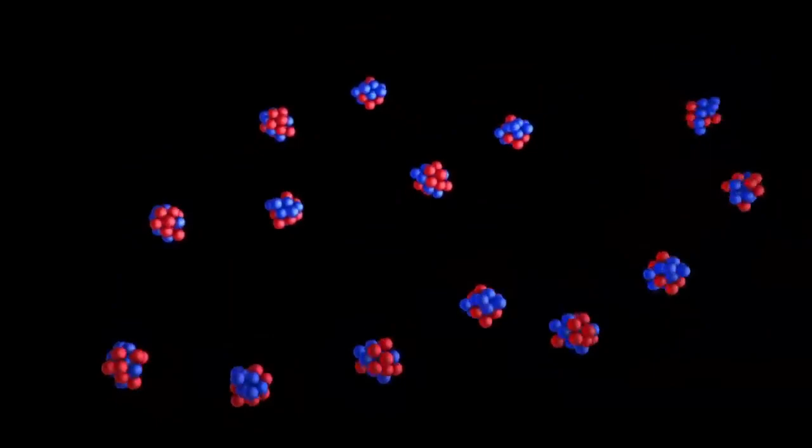Space travel has been one of man's greatest dreams, having the ability to go beyond the comfort of Earth and travel to various galaxies and the great unknown for exploration in search of answers, or just to have a nice time in the stars. But this dream has been hampered because we do not have the jet propulsion technology to properly escape our homeworld.

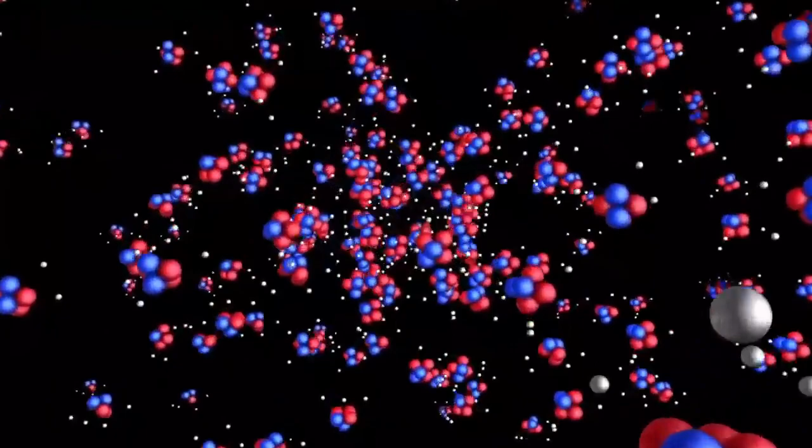But all this will soon be a thing of the past, as nuclear thermal propulsion, which uses heat energy from the nuclear reaction at its core for fuel, could be used one day in human spaceflight, possibly in the not-too-distant future for our colonization of Mars. Its development is the one true challenge, as the materials used must be able to withstand high heat and bombardment of highly charged particles regularly.

There is a new space race developing, with higher stakes and more ambitious goals than just going back to Earth orbit or the Moon. The United States, which has developed a sizable lead on technologies in rocket and satellite technology, has in turn grown its national and global space ambitions. Now that it is practicable to get to low Earth orbit affordably and reliably, astronauts and private companies are now looking to take it further, including establishing permanent colonies on the Moon and Mars, mining asteroids for their immense natural deposits, and sending astronauts to search for life on the moons of the outer planets.

And America is not the only one in this race. China and Russia are working together on a lunar base, and China claims it will be the first to colonize Mars and even mine asteroids.

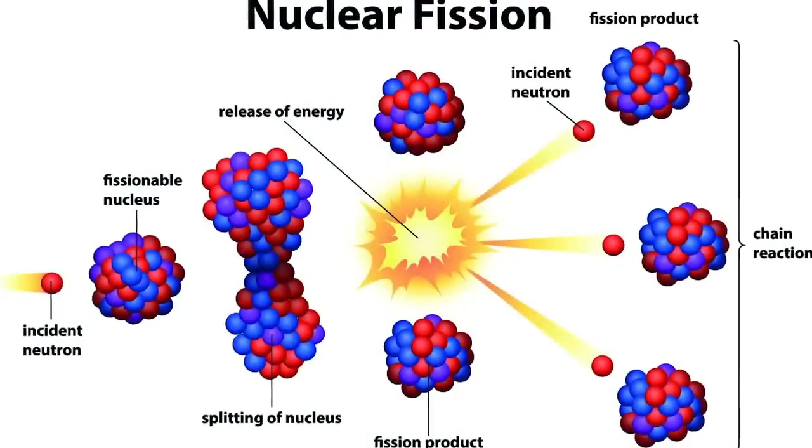Nuclear fission and fusion power will be essential to accomplishing these and other ambitions. These technologies can deliver the performance, including immense power levels, longevity, and reliability, required to take large people and cargo astronomically long distances, and support the power requirements for long-term colonies far removed from the safety net of Earth.

To this end, China is reportedly making investments in the advanced propulsion sector, including in fission and fusion contracts that dwarf U.S. effort. For the United States to remain competitive on the world scale and win what some are calling the new deep space race, they must double down on investment in nuclear fission and fusion technologies.

Will Searight, a nuclear engineering doctoral student at Penn State, is contributing to research that could make these advancements more feasible. He published findings from a preliminary design simulation in Fusion Science and Technology, a publication of the American Nuclear Society. To better investigate nuclear thermal propulsion, Searight simulated a small-scale laboratory experiment known as a hydrogen test loop.

The setup mimics a reactor's operation in space, where hydrogen travels through the core and propels the rocket at temperatures up to nearly 2,200 degrees Fahrenheit.

Searight developed the simulation using dimensions from detailed drawings of tie tubes, the components that make up much of the test loop through which hydrogen flows. Industry partner Ultra-Safe Nuclear Corporation, USNC, provided the drawings.

Understanding how USNC's components behave in a hot hydrogen environment is crucial to bringing our rockets to space, Searight reasoned. We are thrilled to be working with one of the main reactor contractors for NASA's Space Nuclear Propulsion Project, which is seeking to produce a demonstration nuclear thermal propulsion engine within a decade.

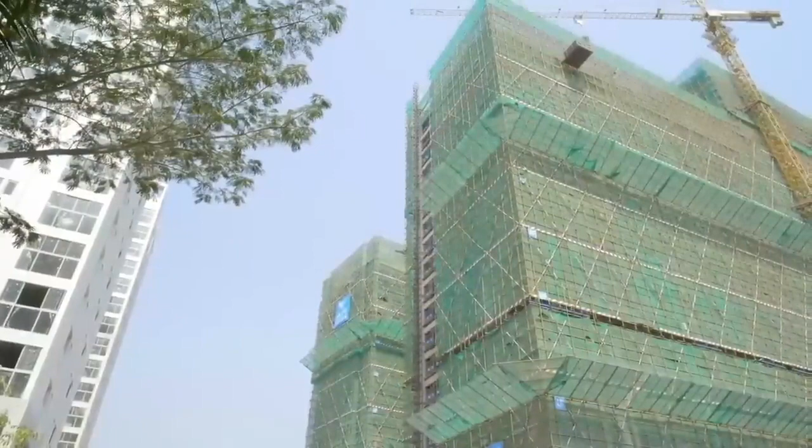Data collected from the modeling software showed that the flow of hydrogen through the test section was smooth and uniform, reducing the uneven distribution of heat through the loop that could jeopardize the setup's safety and lifespan. Analysis of the results also verified that stainless steel would allow for more convenient and cost-effective construction of the loop.

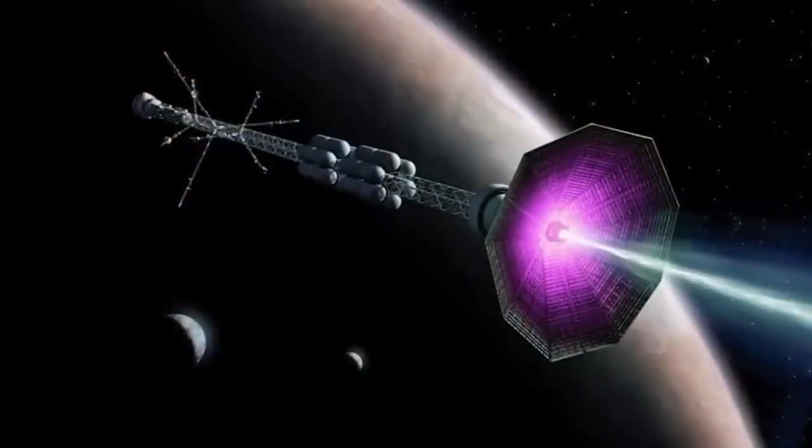The fusion rocket. So one might wonder, a fusion rocket? How's that possible? Are we onto some Star Trek imaginations right now?

A fusion rocket is a theoretical design for a rocket driven by fusion propulsion that could provide efficient and sustained acceleration in space without the need to carry a large fuel supply. The design requires fusion power technology beyond current capabilities and much larger and more complex rockets.

Fusion nuclear pulse propulsion is one approach to using nuclear fusion energy to provide propulsion. Fusion's main advantage is its very high specific impulse, while its main disadvantage is the likely large mass of the reactor. A fusion rocket may produce less radiation than a fission rocket, reducing the shielding mass needed.

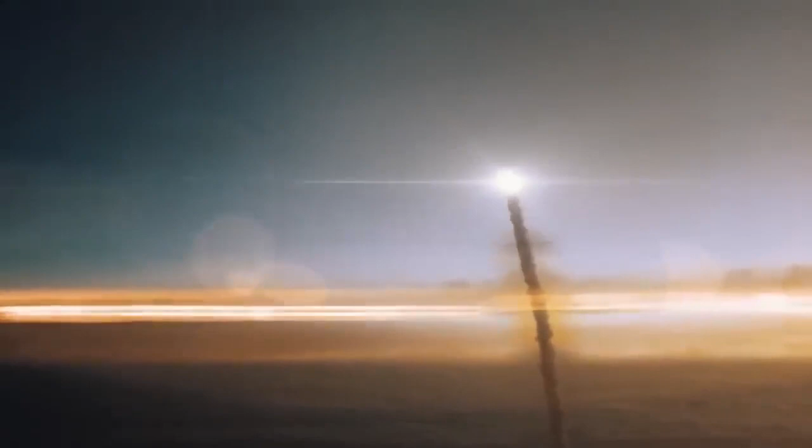The surest way of building a fusion rocket is to use hydrogen bombs as proposed in Project Orion, but such a spacecraft would be massive, and the Partial Nuclear Test Ban Treaty prohibits the use of such bombs. For that reason, bomb-based rockets would likely be limited to operating only in space.

An alternative approach uses electrical, e.g. ion propulsion, with electric power generated by fusion instead of direct thrust. Spacecraft propulsion methods such as ion thrusters require electric power to run, but are highly efficient. In some cases, their thrust is limited by the amount of power that can be generated running on fusion power that could drive such a ship.

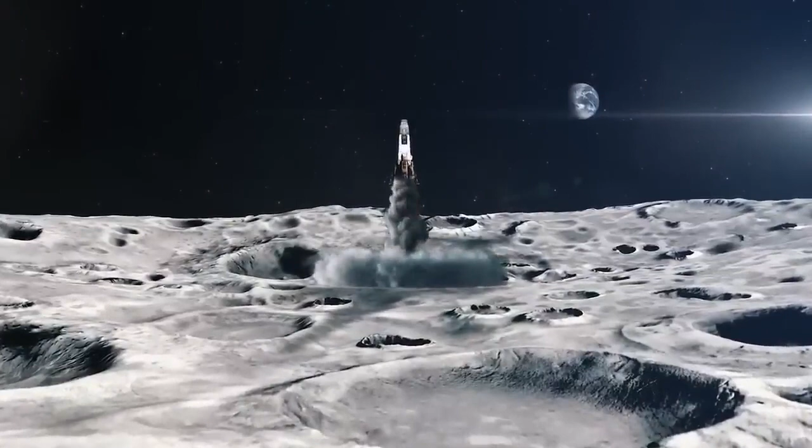One disadvantage is that conventional electricity production requires a low-temperature energy sink, which is difficult, i.e. heavy, in a spacecraft. Direct conversion of the kinetic energy of fusion products into electricity mitigates this problem.

One attractive possibility is to direct the fusion exhaust out the back of the rocket to provide thrust without the intermediate production of electricity. This would be easier with some confinement schemes, example magnetic mirrors, than with others, example tokamaks. It is also more attractive for advanced fuels.

Helium-3 propulsion would use the fusion of helium-3 atoms as a power source. Helium-3, an isotope of helium with 2 protons and 1 neutron, could be fused with deuterium in a reactor. The resulting energy release could expel propellant out the back of the spacecraft.

Helium-3 is proposed as a power source for spacecraft mainly because of its lunar abundance. Scientists estimate that 1 million tons of accessible helium-3 are present on the Moon.

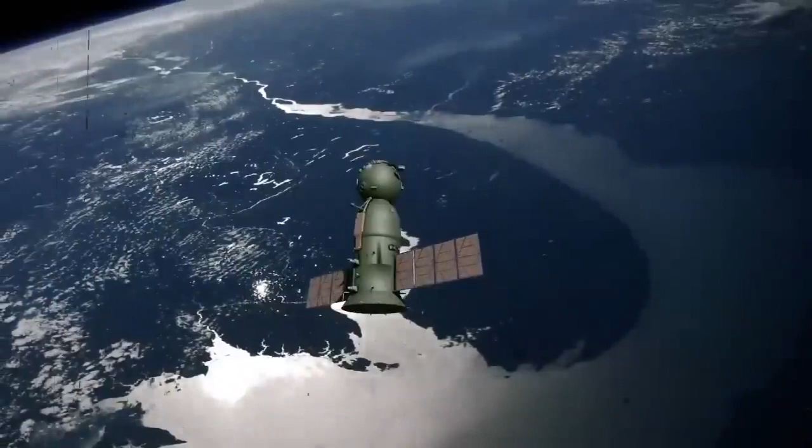Only 20% of the power produced by the DT reaction could be used this way, while the other 80% is released as neutrons, which, because they cannot be directed by magnetic fields or solid walls, would be difficult to direct towards thrust. Helium-3 is produced through the beta decay of tritium, which can be produced from deuterium, lithium, or boron.

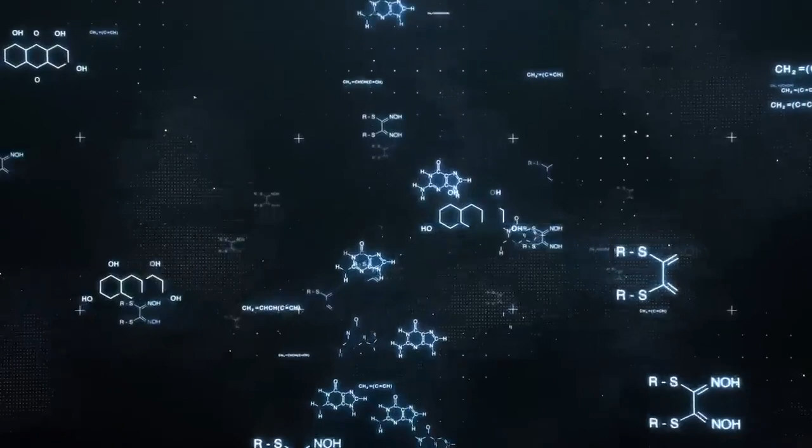Even if a self-sustaining fusion reaction cannot be produced, it might be possible to use fusion to boost the efficiency of another propulsion system, such as a VASIMR engine.

So this poses the question, what are the confinement alternatives? Magnetic: to sustain a fusion reaction, the plasma must be confined. The most widely studied configuration for terrestrial fusion is the tokamak, a form of magnetic confinement fusion. Currently, tokamaks weigh a great deal, so the thrust-to-weight ratio would seem unacceptable.

NASA's Glenn Research Center proposed a small aspect ratio spherical torus reactor for its Discovery 2 that could deliver a crewed 172,000 kilogram payload to Jupiter in 118 days, or 212 days to Saturn, using 861 metric tons of hydrogen propellant plus 11 metric tons of helium-3 deuterium, DHE3, fusion fuel.

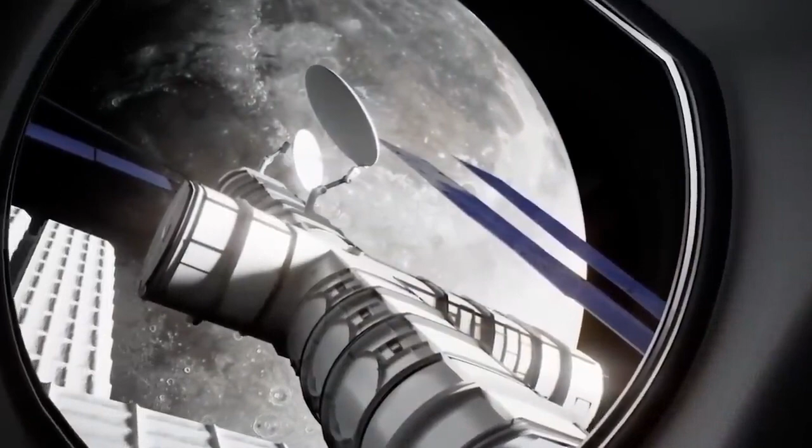The hydrogen is heated by the fusion plasma debris to increase thrust at a cost of reduced exhaust velocity, 348 to 463 kilometers per second, and hence increased propellant mass.

Inertial: the main alternative to magnetic confinement is inertial confinement fusion, ICF, such as that proposed by Project Daedalus. A small pellet of fusion fuel with a diameter of a couple of millimeters would be ignited by an electron beam or a laser. To produce direct thrust, a magnetic field forms the pusher plate.

In principle, the helium-3 deuterium reaction or an aneutronic fusion reaction could be used to maximize the energy in charged particles and to minimize radiation, but it is highly questionable whether using these reactions is technically feasible. Both of the detailed design studies in the 1970s, the Orion Drive and Project Daedalus, used inertial confinement.

In the 1980s, Lawrence Livermore National Laboratory and NASA studied an ICF-powered Vehicle for Interplanetary Transport Applications, or VISTA. The conical VISTA spacecraft could deliver a 100-ton payload to Mars orbit and return to Earth in 130 days, or to Jupiter orbit and back in 403 days.

41 tons of deuterium-tritium (DT) fusion fuel would be required, plus 4,124 tons of hydrogen expellant. The exhaust velocity would be 157 kilometers per second.

Magnetized target fusion, or MTF, is a relatively new approach that combines the best features of the more widely studied magnetic confinement fusion—good energy confinement—and inertial confinement fusion—efficient compression heating and wall-free containment of the fusing plasma.

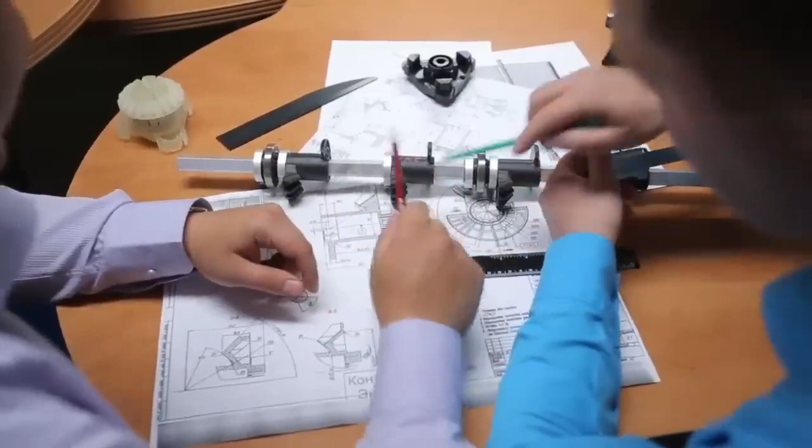Thanks! World's tallest buildings—skyscrapers, part of the increasingly impressive modern marvels which can be counted as insane, taking into account how high they rise above the clouds, seeming to rise endlessly into the sky. Some of them are residential buildings, some others are offices, and a very few select are a hybrid mix of offices, apartments, and even hotel rooms.

The views are breathtaking, but they come down to cost. Take the Burj Khalifa in downtown Dubai, for instance, which features residential units varying from studios to an opulent 5-bedroom penthouse that was going for $27,770,000 in 2017.

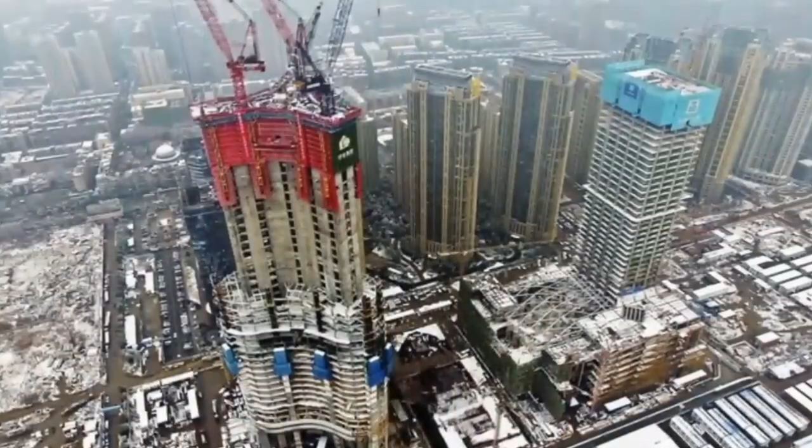Wuhan Greenland Center. Location, Wuhan, China. Height, 1,562 feet. Completion, 2022, estimated. Work done on this skyscraper, which is ongoing by the way, began in June 2012 and will feature hotel rooms and office space in addition to parking space, banquet halls, and even bike storage space. Originally, the Wuhan Greenland building was going to be 2,087 feet, but that was abandoned because of airspace restrictions.

Central Park Tower. Location, New York, USA. Height, 1,550 feet. Completion, 2020. Located at 217 West 57th Street, Central Park Tower is located along Billionaires Row in Midtown and is also known as Nordstrom Tower because of the Nordstrom store on the lower floors. This structure is the tallest residential building in the world, housing 179 condo units that start at a cool $7 million. The $3 billion project is also the second tallest building in the United States and features an incredible view of its namesake park.

Lakhta Center. Location, St. Petersburg, Russia. Height, 1,516 feet. Completion date, 2019. Striking straight into the sky, the distinct design of the Lakhta Center on the outskirts of St. Petersburg offers a lonely spire in a horizontal landscape that will serve as the centerpiece to a growing neighborhood around it that includes plenty of open space for pedestrians. The building includes thermal insulation through a double-glazed facade to combat the summertime heat and an ice formation control system for winter weather.

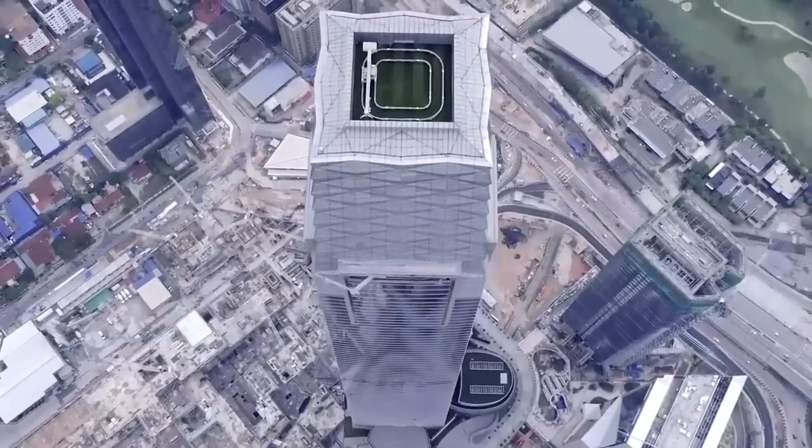The Exchange 106. Location, Kuala Lumpur, Malaysia. Height, 1,462 feet. Completion date 2019. Using a 12-story illuminated crown to accentuate the height of the exchange development in the Tun Razak Exchange Financial District development in Kuala Lumpur, the new skyscraper gives visitors a shiny new example of height in Malaysia. The Peter Chan architect design is structurally completed with the opening, including a mix of uses of the 106-floor building planned then for 2019.

With that, we have come to the end of the video.

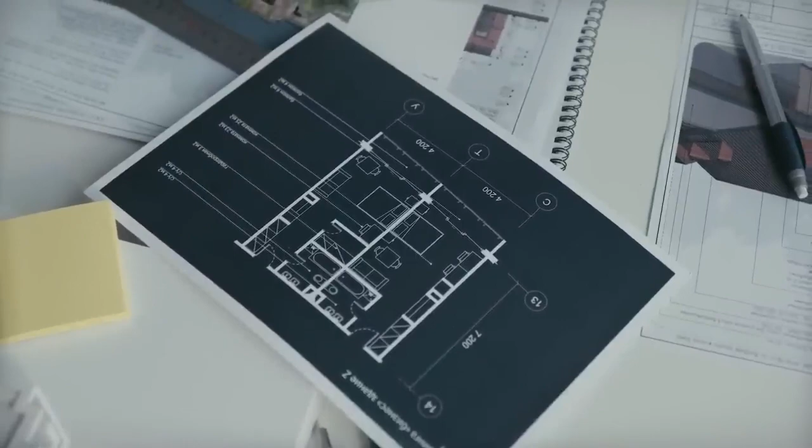Channel Engineering Progress, where we bring, dissect, and explain in easy-to-digest bits some of the most complex engineering feats and happenings. Today on this stream, we're discussing the world's deepest swimming pool.

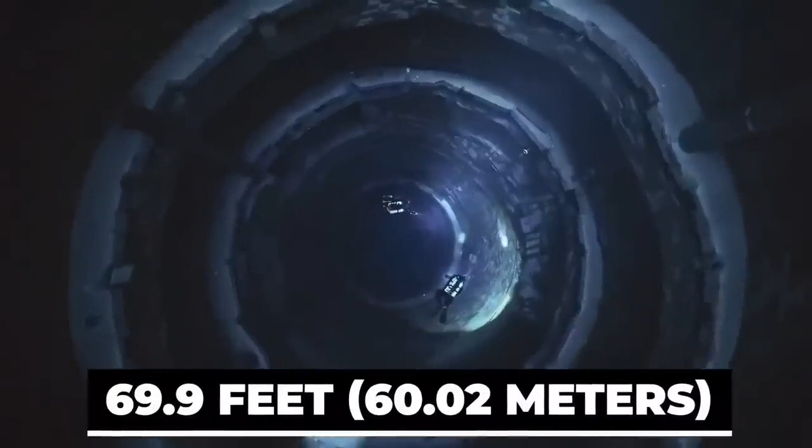There's also a record that went under the radar till an Instagram video from Will Smith brought it to the world's attention: the deepest swimming pool ever created. Deep Dive Dubai, located in Dubai's Nad Al Sheba neighborhood, is now verified by the Guinness World Record as the world's deepest swimming pool, at a depth of 69.9 feet or 60.02 meters, and holds 14 million liters of water, that the owners say is equivalent to 6 Olympic-sized swimming pools.

Deep Dive Dubai allows thrill seekers to dive inwards and discover a new underwater dimension filled with adventure and wonder. We offer an unparalleled experience with year-round diving in a safe environment with outstanding instructors and services. Abdullah bin Habtour, spokesperson for Deep Dive Dubai, said in a statement, 'This facility is an investment in Dubai's growing sports culture and will add another world-class destination to Dubai's thriving tourist attraction and adventure tourism sector.'

The pool, which is shaped like a giant oyster, is a nod to the region's pearl diving heritage. It features the latest technology for divers, including a hyperbaric chamber along with an entire sunken city for the divers to explore. The pool also comes with state-of-the-art lighting, sound, and a mood system.

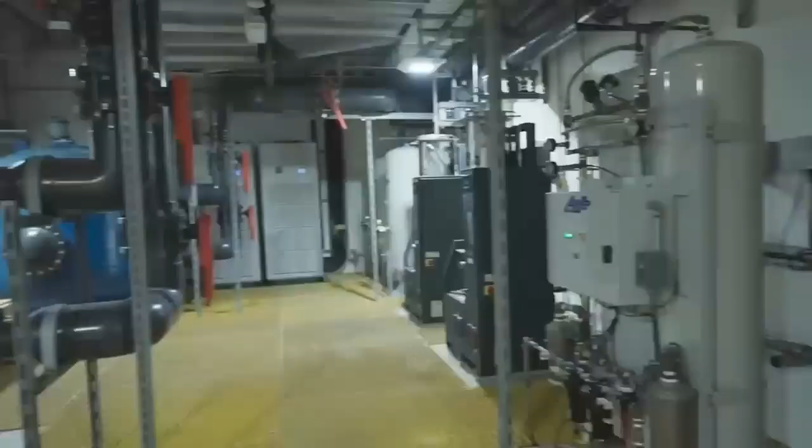The pool's water is also ultra clean, thanks to its filtration system that circulates water every 6 hours through siliceous volcanic rock, NASA-developed filter technology, and UV radiation. Water temperature is maintained at 30 degrees Celsius, 86 degrees Fahrenheit, a comfortable temperature for wearing a thin wetsuit or a swimsuit. Bin Habtour also added, 'We hope to embody the determination of Emirati explorers and innovators, both past and present, as well as provide a platform for future achievements and discoveries.'

Beyond the pool itself, the facility is also home to a dive shop, gift shop, and 80-seat restaurant which is open to the public, as well as a variety of meeting, event, and conference spaces, a sunken city, and underwater film studio.

Ever had the childhood dream of having a pool so big you can put some of your life-size toys in it, with various channels and tunnel access leading to various chambers housing them? Well, you can, kinda. You can go play with all the ones owned by Deep Dive Dubai.

The biggest star of Deep Dive Dubai is arguably the pool's underwater city. Divers can explore abandoned sunken city apartments and play underwater pool in the arcade. State-of-the-art lighting and sound systems have been fitted inside the pool to create different atmospheres, reaching depths of 60.02 meters, and that is barely scraping the surface of the astonishing features the facility contains.

Within the pool's abyssal depths is a lost city, complete with derelict streetscapes, apartments, and many more surprises. It's safe to say that the project takes pool design to a whole new level, in an embodiment of Dubai's endless quest for ostentation.

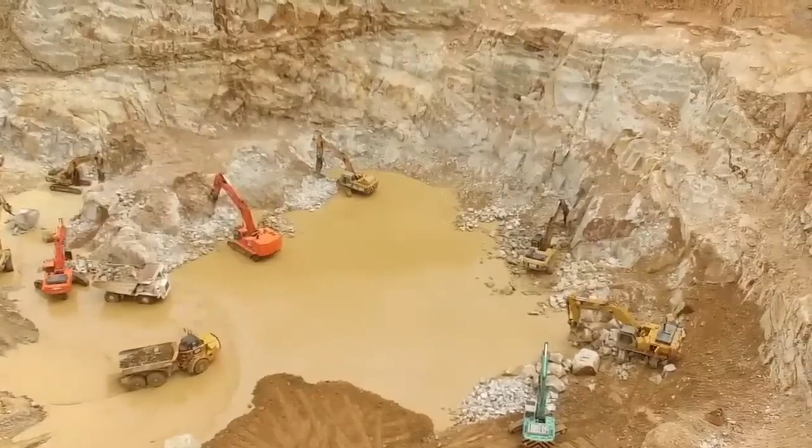Regarding obstacles encountered in realizing such an ambitious project, Kjoller shares that digging a 60-meter shaft in the sand was a challenge, as was managing galvanic corrosion in an environment with so many different metals and materials.

The pool also acts as an underwater film studio, the largest of its kind in the region. A media editing room is available nearby the facility.

Deep Dive Dubai also offers courses for both diving beginners and certified divers. Divers can also explore the pool and underwater city by themselves after a tour with one of the dive guides at the site. Some 56 cameras have been installed around the pool to ensure the safety of divers at every corner.

It also has the region's most advanced hyperbaric chamber, with a capacity of 12 people in case of an emergency. There are quite a few dive pools in the world that are deep, but this one is so much more interesting, the Deep Dive director stated.

It's not only deepest and largest, but the sunken city effect makes it next world order. There are so many things, it's not fair to call it a pool. In a city like Dubai, where it's difficult for architects to hide their projects from each other to prevent competition until a few weeks before launch, Deep Dive Dubai was properly kept under wraps, and that's a testament in itself.

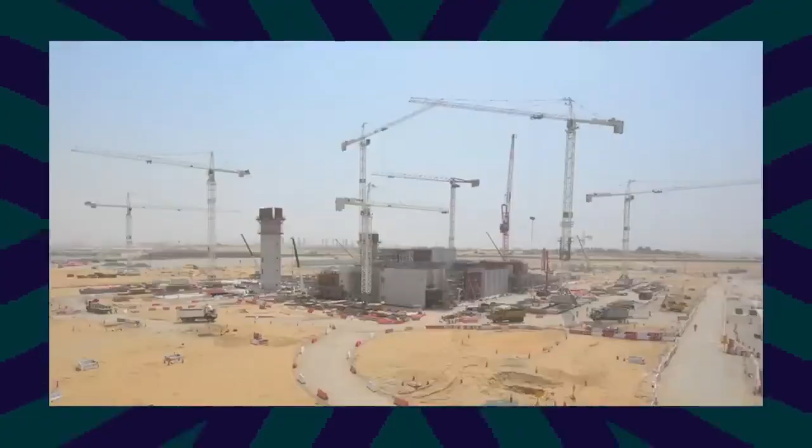Therefore, there's not much information around how it was constructed and the science behind its construction. But one certain thing: in building a record-breaking pool, there are some unusual traits they have in common.

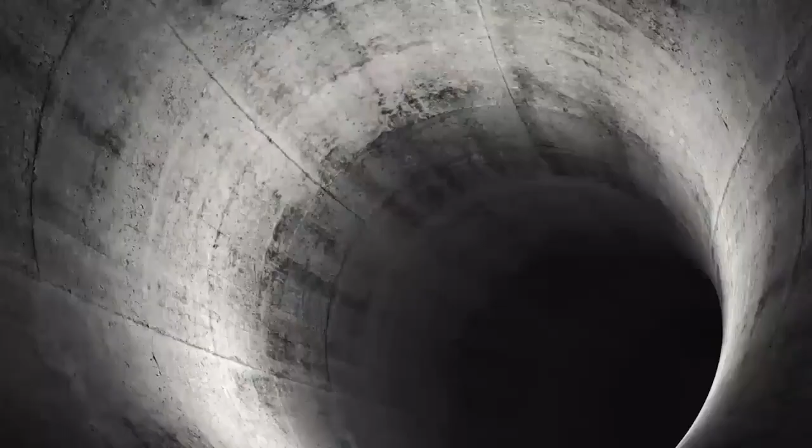Working from the top down, the process is basically like constructing pools within pools. As the first chamber is excavated and lined with concrete, it becomes the launch point for the next chamber, and those chambers become progressively smaller the deeper the pool goes, all culminating in a narrow dive shaft.

Due to the amount of pressure the shaft will be under when the pool is filled, it is formed from a precast concrete tube that is reinforced with a further 1.5 meters of concrete around it. The whole thing is designed to move and settle in the ground once the weight of the water is added, and divers are advised not to travel more than 300 meters above sea level within 24 hours of visiting.

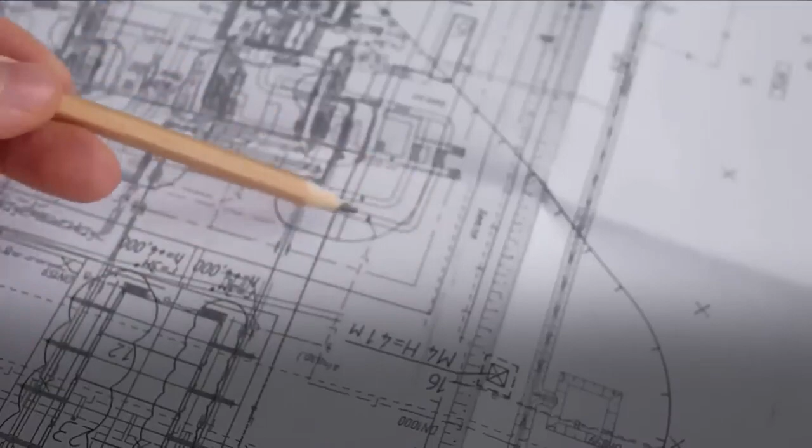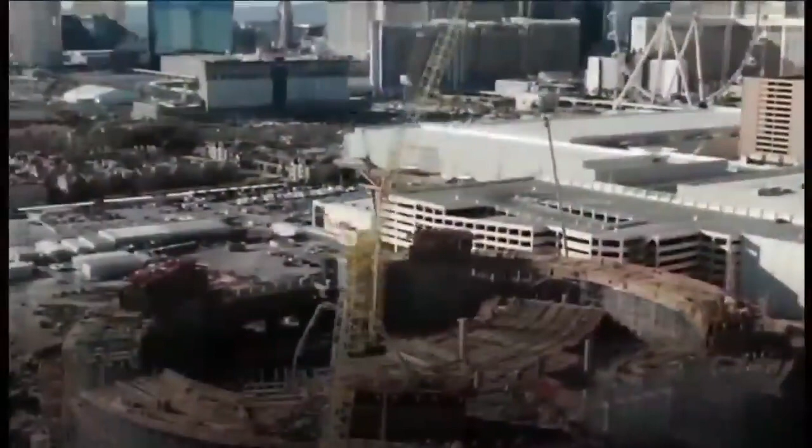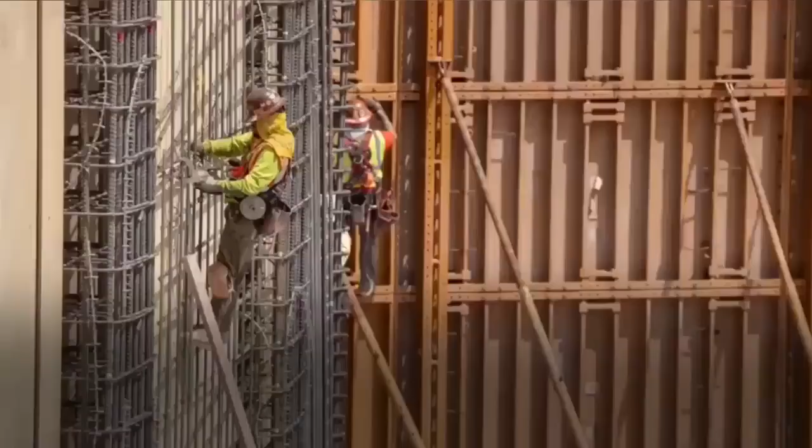The MSG Sphere Arena was announced in February 2018, and is built in partnership with the Madison Square Garden Company, MSG, and Las Vegas Sands Corporation. The MSG Sphere is located east of the Las Vegas Sands Venetian Resort and just off the Las Vegas Strip. The Sphere was designed by Populous.

The property will include 304 parking spaces, while additional spaces will be available at the parking garages for the nearby Venetian, Palazzo, and Sands Expo. A groundbreaking ceremony was held on September 27, 2018, and was attended by approximately 300 people, including Las Vegas Sands' Sheldon Adelson and Nevada Governor Brian Sandoval.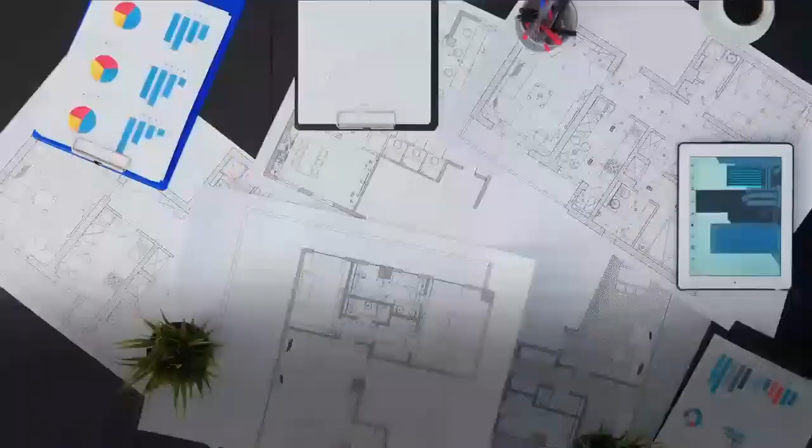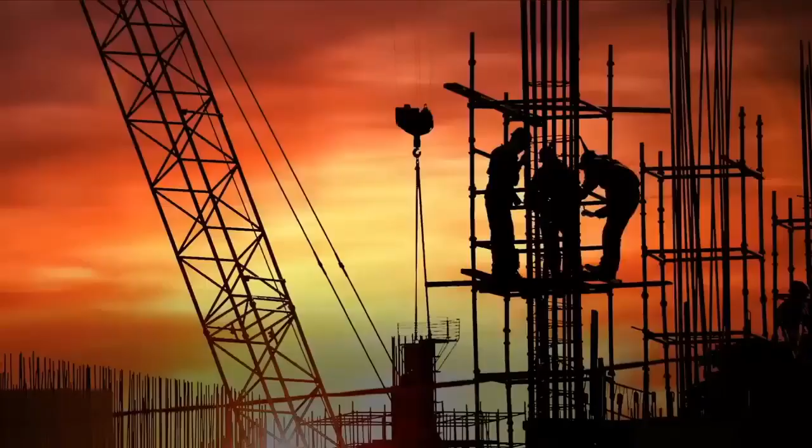In November 2018, it was reported that the MSG Sphere would be built along with new bars, private suites, a museum, and retail space. AECOM began working on the site in February of 2019 through a preliminary agreement. AECOM had worked on several other stadia, including the T-Mobile Arena in Las Vegas.

The world's largest LED sphere: the dome-like structure will be the world's largest sphere, and also contain the largest high-resolution LED screen on the planet.

Since the days of Dean Martin and the Rat Pack in the 1960s, Las Vegas has been the timeless hub for live entertainment, with showcase fights and hotel residencies from Elton John, Celine Dion, and Britney Spears. This new edifice will not only transform the Las Vegas skyline, but reshape the live entertainment industry.

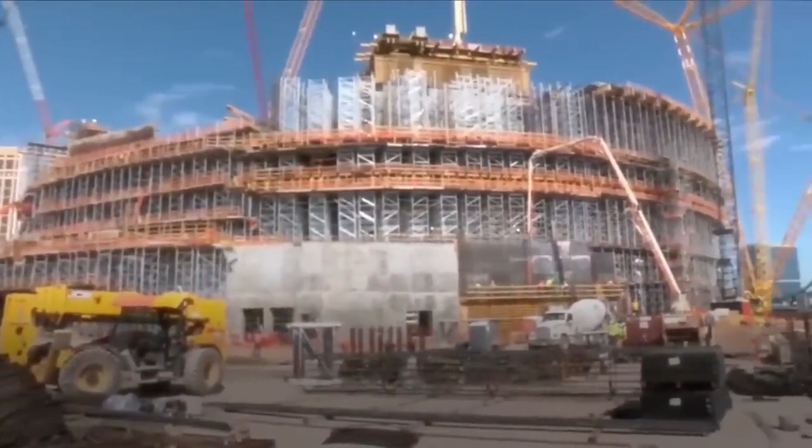The latest spectacle is developed by Madison Square Garden Entertainment, located just off the strip behind the Venetian, unlike anything anyone has seen on Earth, as it's the world's largest LED sphere.

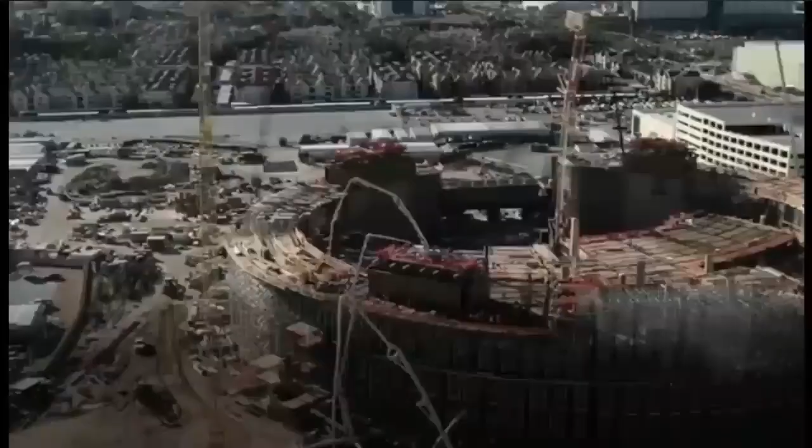Officially known as the MSG Sphere, the structure will cost a whopping $1.8 billion and will stand at 112 meters tall. The venue's seating capacity is 17,500, and it offers the world's highest resolution LED screen with 19,000 by 13,500 Full HD 1920 by 1080 pixels.

It covers an area larger than 3 football fields, wrapping the crowd in an immersive experience that is 100 times clearer than any of today's best HD TVs. On the outside, the sphere will be clothed with 54,000 square meters of programmable lighting, giving those who cannot get in a show of their own.

The radical improvement of technology has allowed humans to feel things more intensely, whether through music, video games, or movies, via spatial lossless audio, VR assistance, etc. The MSG Sphere is more than just a huge HD screen. Using an advanced acoustic system called beamforming technology, multiple audio streams can be delivered directly to individual seats simultaneously, while an infrasound haptic system uses vibrations to engage guests to feel the sound around them.

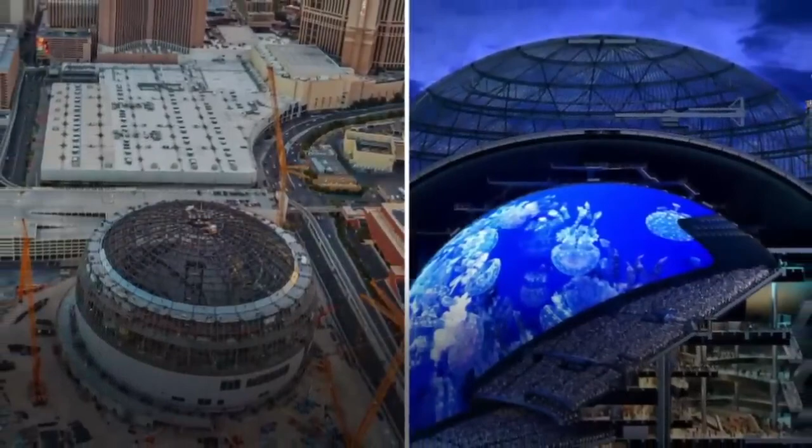So what are we to expect from this project? Upon completion, the MSG Sphere will be 366 feet (112 meters) high, and 516 feet (157 meters) wide at its broadest point. It'll include seating for 17,500 persons, and all seats will have high-speed internet access.

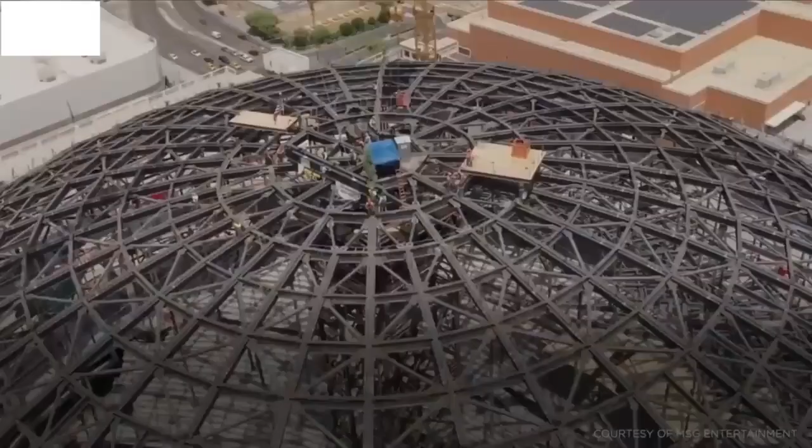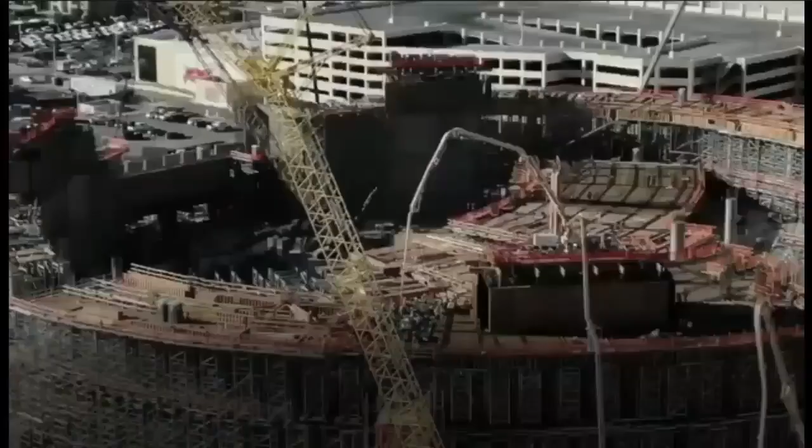The venue can accommodate 20,000 people in standing capacity. The MSG Sphere will be equipped with 19,000 by 13,500 resolution LED screens spread across the interior. The wraparound screen will measure 160,000 square feet (15,000 square meters), making it the largest and highest resolution LED screen in the world.

Ted King, who previously worked on Star Trek: The Experience, will create the visual content for the MSG Sphere. The sound delivery system will deliver sound through the floorboards. The exterior of the venue will feature 54,000 square meters of programmable lighting.

The arena will primarily host awards shows and concerts, in addition to other entertainment events. Although it wasn't designed to host sporting events, there's the possibility of hosting matches for boxing and mixed martial arts. A 1,000-foot pedestrian bridge will connect the sphere to the Sands Expo.

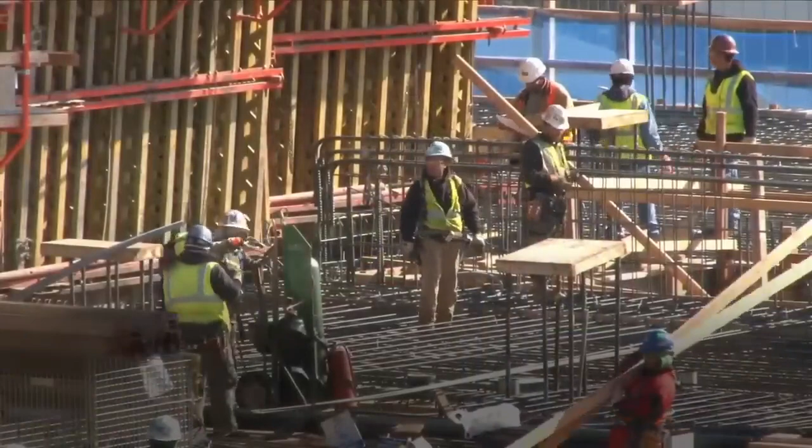This looks like a daunting task, and you're wondering how all this can fit, as it requires absolute madness, right? The engineering going into the construction is unlike anything seen before. Work started in 2018, with the drilling of nearly 600 piles and the excavation of about 84,000 cubic meters of soil.

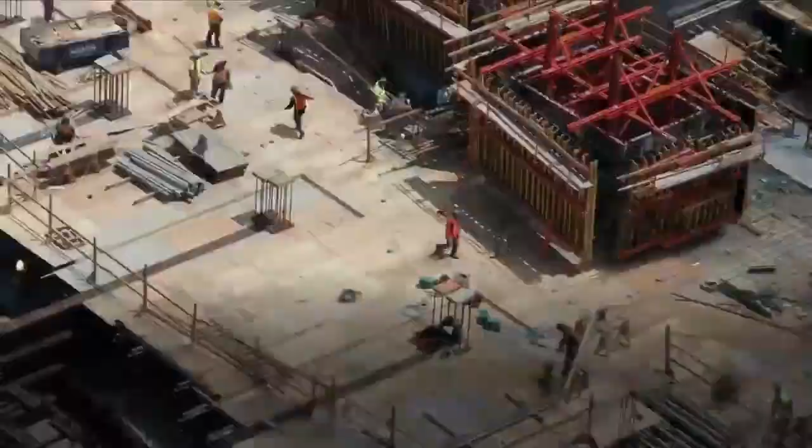That, unlike popular belief, is not to prevent the sphere from rolling over like when Messi is weaving his magic, but to support the enormous weight of the structure and create a 5,000 square meter basement for the event's dressing rooms and other necessities that make the venue run.

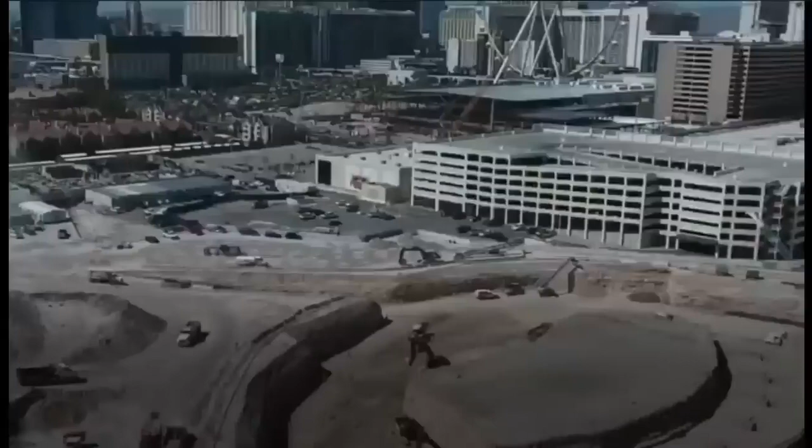The building's superstructure is made of 4 concrete cores, tied together with over 9,500 tons of steel to create a series of tension ring beams that hold the weight of the 11,000-ton roof.

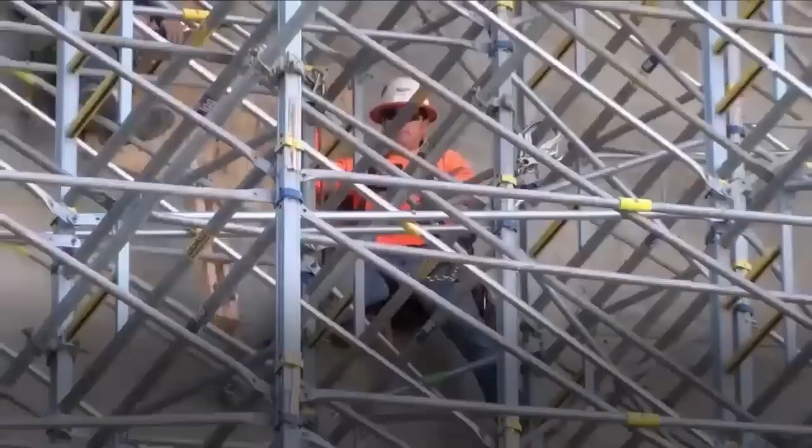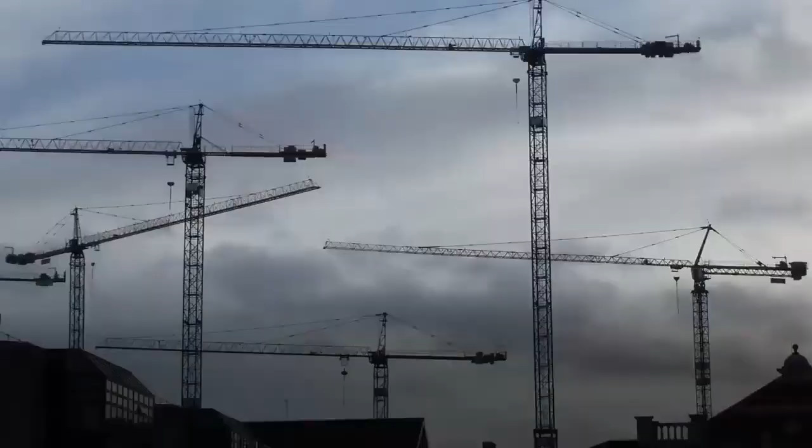For this and other work to be completed, given the huge distances involved, the team had to import the 4th largest crawler crane from Belgium to position some of the largest and heaviest components. Standing a staggering 10 meters higher than the nearby High Roller observation wheel at its peak, the crane was assembled on site in 18 days, as this project was on its own scale.

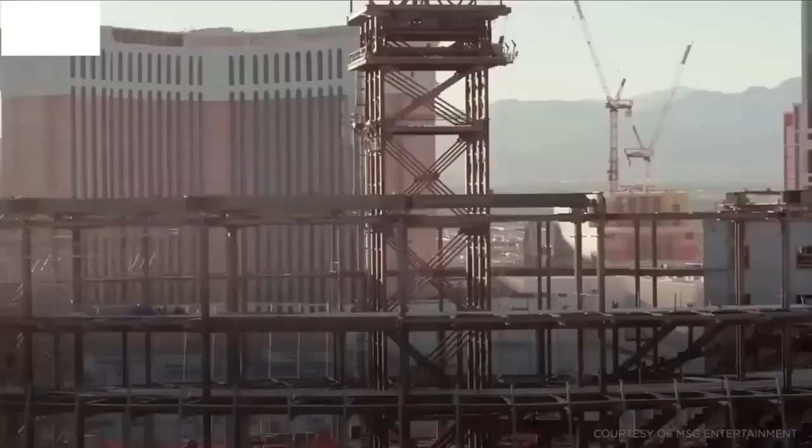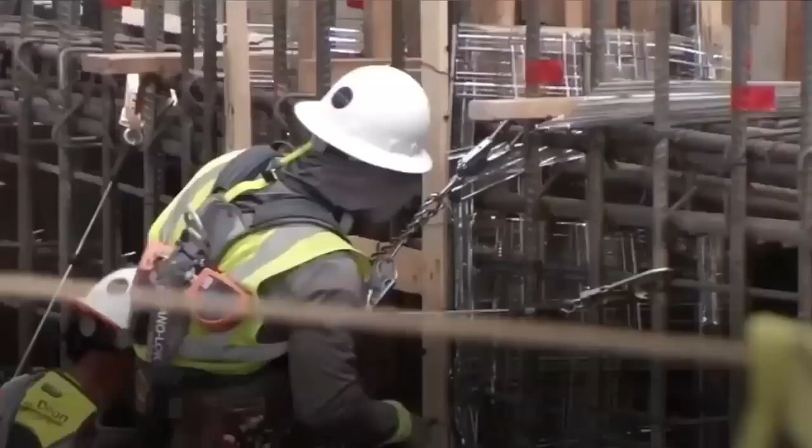To construct the roof, an 86-meter temporary shoring tower was first erected in the middle of the arena. Then a 154-ton compression ring was placed on top, into which 32 steel trusses would be connected. Because of their immense size and weight, the compression ring and trusses were each assembled on the ground over several weeks before being craned into place.

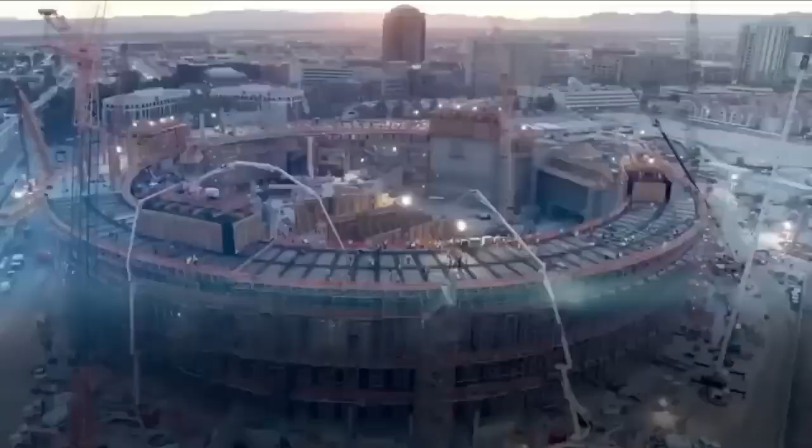The temporary shoring was later removed, and the equal forces of the roof structure began to counter each other, creating a column-free, uninterrupted space within the sphere. In February 2020, Madison Square Garden said the cost of the project had increased to $1.66 billion as a result of design changes consisting of guest enhancements.

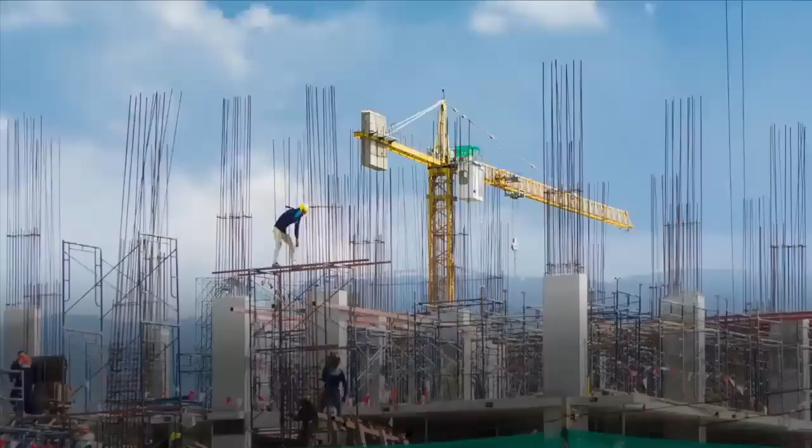That month, the world's 4th largest crane was set up on the site's northwest side for the purpose of lifting heavy construction materials. In a disassembled state, the crane was transported across the Atlantic Ocean from Zeebrugge, Belgium to Port Hueneme, California. The crane then needed 120 tractor-trailers to transport it to Las Vegas.

In March 2020, construction reached the widest point of the sphere, the 516-foot equator, located at the 6th level and 108 feet above the ground. MSG Sphere is expected to create 4,400 jobs upon opening. The project had been scheduled to open in 2021.

On March 31, 2020, Madison Square Garden announced that construction work would be suspended due to the COVID-19 pandemic. The project experienced a disruption in its supply chain as a result of the pandemic, and this hindered construction progress. All construction work on the project was expected to come to a stop within the next 2 weeks following the announcement.

In August of 2020, MSG Entertainment announced that construction had resumed on the project, with the opening rescheduled for 2023. Over the subsequent 15 months, construction would be focused on concrete, followed by steel erection, and then the 13,000-ton steel domed roof, the most complex part of the project.

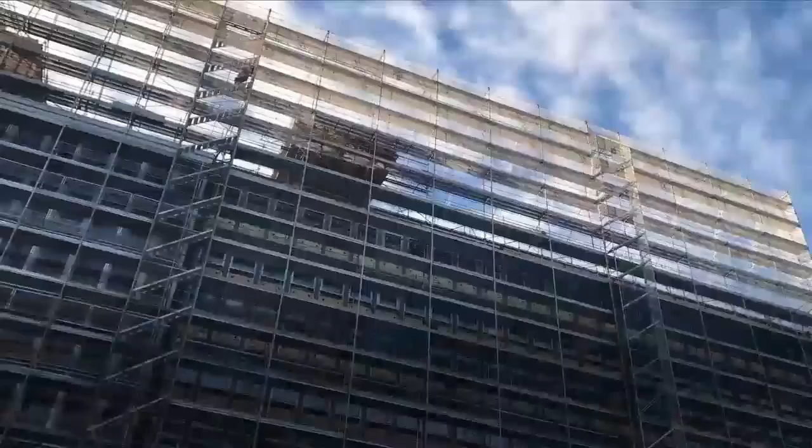In October 2020, crews completed the heaviest lift up to that point, with the installation of two 240-ton steel girders. Topping out the steel framework, a 170-ton steel compression ring, was added in February 2021, which made it the heaviest lift of the entire project.

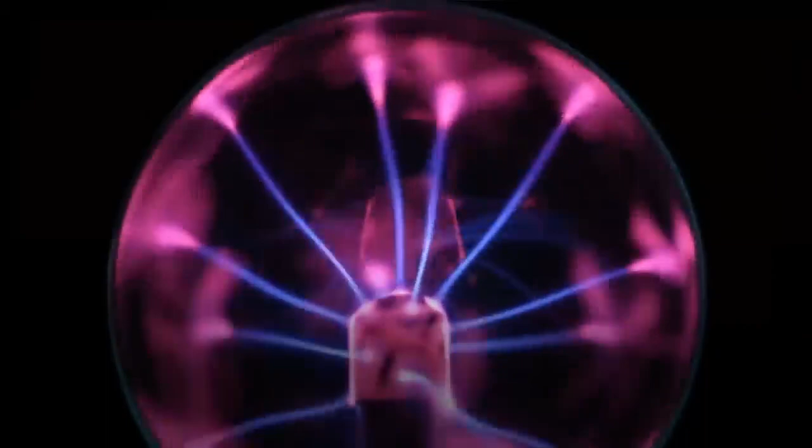Due to its size, the ring had to be assembled at the construction site. Work crews spent 3 weeks bolting the prefabricated steel pieces together, and the crane was used to lift the ring into place. Having been completed, work is now fully underway on the sphere's geodesic exoskeleton, which will add 24 meters to its overall height and provide the surface for the exterior LED displays.

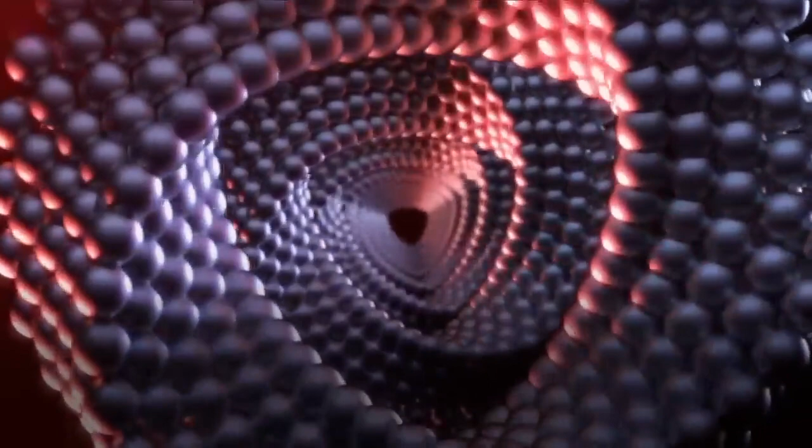Once the sphere is fully enclosed, work on the state-of-the-art fit-out will begin. Madison Square Garden took over as general contractor in December 2020, although AECOM continued to provide support.

Even though a lot of folks thought the MSG Sphere is and would be just a regular arena, its completion will be an immeasurable addition to the city's skyline. Nonetheless, with the Venetian and Palazzo set to be connected through the Sands Expo and Convention Center, and with additions to the Las Vegas monorail planned, the MSG Sphere is currently accessible via RTC Transit and the Deuce. The MSG Sphere looks set to become the latest sight to be seen.

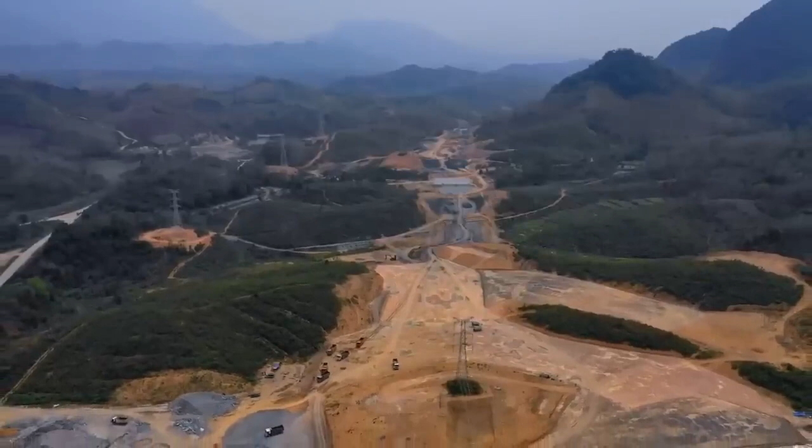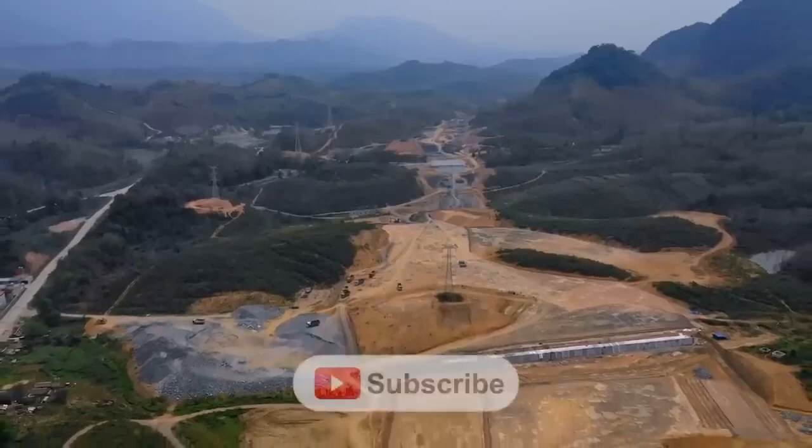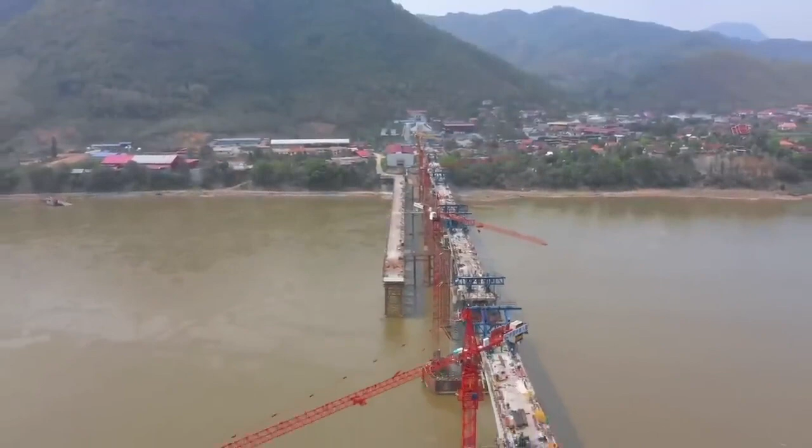Africa, a continent with an entire land area of 30.37 million square kilometers, or 11.7 million square miles, enough to fit in the US, China, India, Japan, Mexico, and many European nations combined. Also home to 54 countries and about 1.2 billion souls. There's this general misconception about the true dimensions of Africa, especially amongst those living in Europe and the Americas.

The problem with maps is not that Africa is wrongly sized, far from it, but the Mercator projection attempts to place the spherical shape of the world onto a cylinder, causing areas closest to the poles to be stretched. Africa, sitting on the equator, barely changes in size. Meanwhile, the countries furthest from the equator become inflated from their true sizes on this type of map.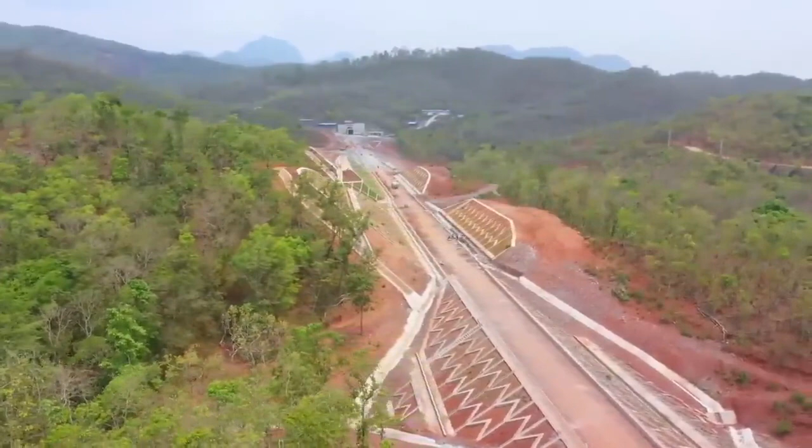This has helped undermine the challenges in connectivity and transportation infrastructure currently faced by countries residing in Africa, as it is the fastest growing urbanizing area on the planet. Africa does not have large-scale railway infrastructure, and to bridge this infrastructural gap, billions have been invested, with the majority of the funding coming from China. This is more than just impressive feats of engineering passing through the rainforest, jungles, safari camps, and deserts. They are symbols of better connected societies, economic opportunities, international alliances, and a shifting balance in the world of construction.

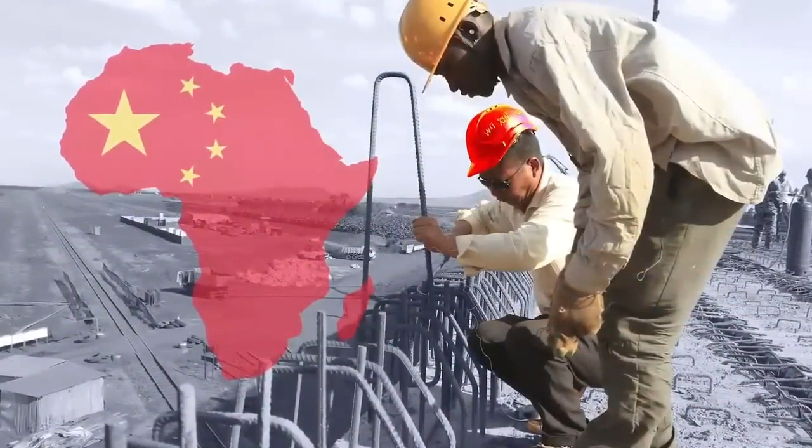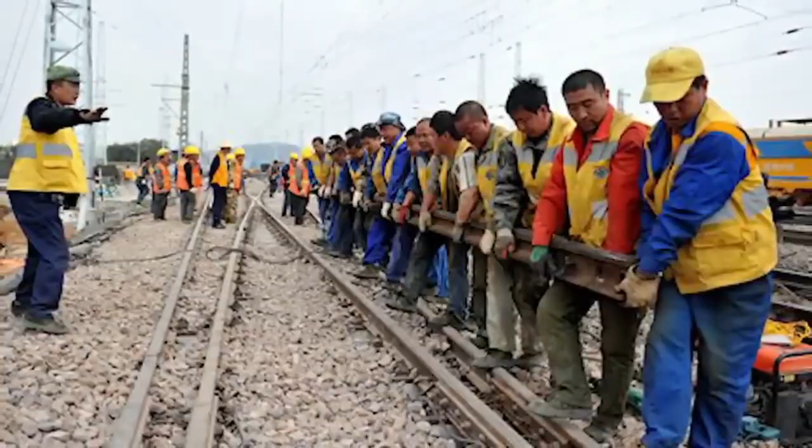To grasp why China is so heavily involved in Africa's railway infrastructural growth, you have to time jump to 1955, where the first large-scale Afro-Asian conference, known as the Bandung Conference, was held. The purpose of this meeting was to discuss world peace and to work together in the light of Western colonialism. From that meeting, the Tazara Railway was born in 1975, a 1,860-kilometer link between Zambia and Tanzania, with the hopes of exporting copper without altercations with the white minority landowners.

The Tazara Railway, also called the Tanzam Railway, is a railway in East Africa linking the port of Dar es Salaam in East Tanzania with the town of Kapiri Mposhi in Zambia's Central Province. It is a single-track railway operated by the Tanzania-Zambia Railway Authority, which was funded in no little part by China.

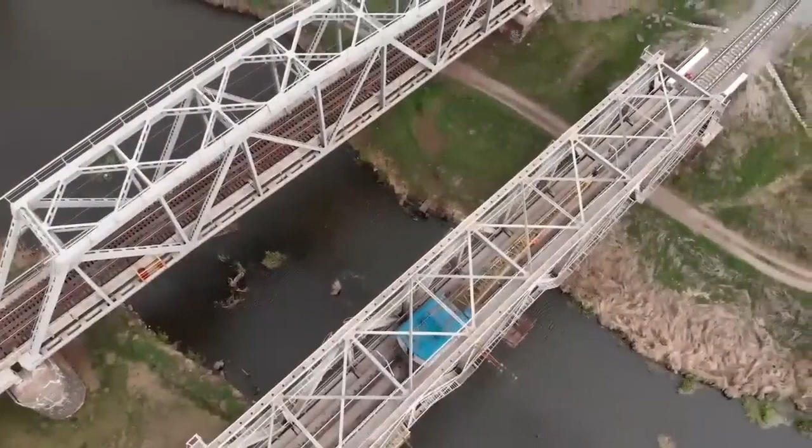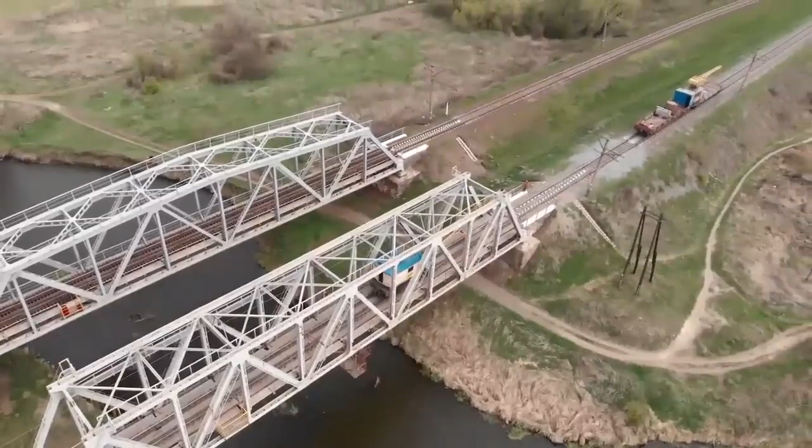Going beyond the Bandung Conference, China has been busy in Nigeria, constructing landmark modern double-track rail lines connecting Lagos, Africa's largest city, to the country's industrial base, Ibadan. This has been officially put into service, making it the first modern double-track standard railway in the West Africa region. The railway stretches about 157 kilometers with a speed of 150 kilometers per hour, marking a landmark cooperation project between China and Africa under the Belt and Road Initiative, with the potential to significantly improve Nigeria's infrastructure and boost economic development. The project is designed, built, and undertaken by the China Civil Engineering Construction Corporation.

The Export-Import Bank of China provided the funds. The Belt and Road Initiative, or BRI, known in Chinese and formerly in English as One Belt, One Road, or OBOR for short, is a global infrastructure development strategy adopted by the Chinese government in 2013 to invest in nearly 70 countries and international organizations.

Even though China stands on the premise that its involvement in railroad infrastructure, construction, and upgrade in Africa is an exercise in altruism, investing in Ethiopia, one of the world's poorest countries, is more strategic and less philanthropic. The United States has scaled down its engagement on the continent, and this is an opportunity being fully grabbed by the Chinese government, with the construction of various factories, supply of basic farming implements, and more complicated machinery made easy to purchase because the Chinese refuse to use expensive machinery in its manufacture, and the construction of the Ethiopia-Djibouti rail line.

This is a new standard gauge international railway that serves as the backbone of the new Ethiopian railway network. The rail network measures 756 kilometers, connecting the landlocked city of Addis Ababa to the ports of Djibouti, which cost a staggering $4 billion, funded by the Chinese government, and began operations in 2018.

Nonetheless, there have been complaints, especially from the Western media, that the Chinese firms handling the construction have refused to employ locals and in return have not helped in unemployment and poverty reduction. This is far from the truth. In Nigeria, the construction of the double-track line hired more than 10,000 locals at its peak and directly created more than 4,000 jobs for locals in order to transfer the operation to them in the future, while the Ethiopia-Djibouti Railway provided an estimated 8,000 jobs for both countries, although it can be said those jobs do not involve senior management positions. There are also returns of investment expected from the operational projects.

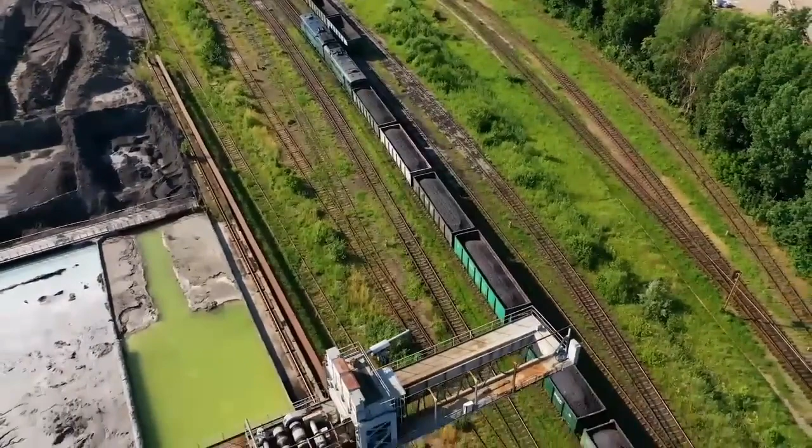China has been very keen to develop its inland and has heavily pushed westward towards Central and Southeast Asia. The country's $1 trillion Belt and Road Initiative is designed to create transport infrastructure for China to import energy and other vital resources from, and export goods to, other parts of the Eurasian continent without relying on its coastal area, which is vulnerable to potential Western sanctions or naval blockades.

ICU's Nagy pointed out that China, which just recently started installing, operating, and using high-speed rails, has already caught up with Japan's Shinkansen in the last decade or so.

The dream of a trans-Asian railway dates as far back as the colonial days, when the British and the French tried to develop a rail network connecting their colonies in Indochina. In 1995, ASEAN members embraced a similar idea, reflecting an aspiration to unify all of Southeast Asia under its initiative, said Seiya Sukegawa, a former Japanese trade official and associate professor at Kokushikan University in Tokyo.

This brings us to the question of what the BRI is with regard to Asia. The BRI is viewed by Beijing as vital in securing its boundaries on the Asian mainland, as it is bordered by 14 nations, including unstable states such as Afghanistan and nations seeking new partnerships in opposition to the U.S., such as Russia. BRI investments are viewed as a way to facilitate China's periphery diplomacy, trade, and infrastructure partnerships with the countries along this enormous land border.

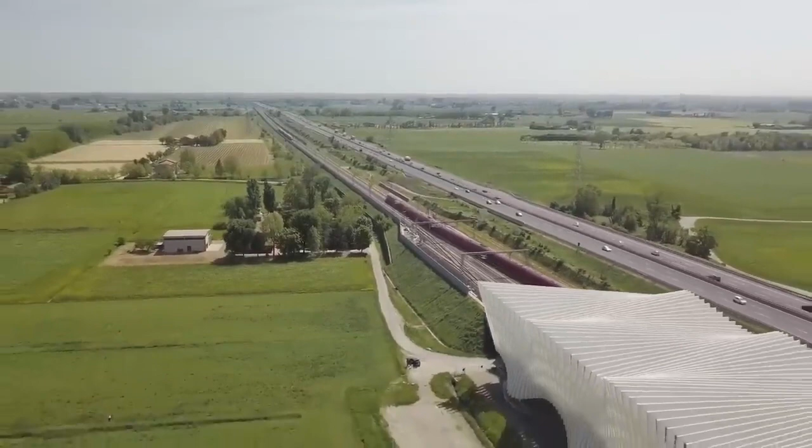In summary, China is giving nations a decision to make between themselves and Western colonials and taskmasters who do not care about the well-being of their citizenry, while China's interest in linking Southeast Asia is for the development of the region and its populace, and also to secure the sovereign borders of China.